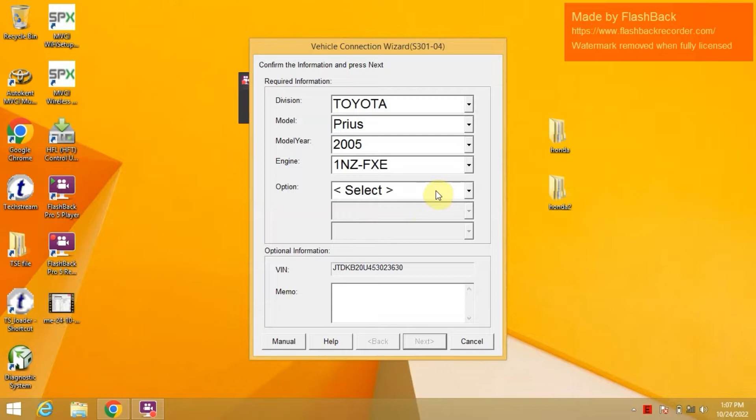Right here it reads the exact type, it auto selects. It knows through the OBD what kind it is, and asks me to select the option with or without smart key. I have no clue, I would say with key. I think I have, I don't know. If it doesn't apply, it probably won't appear. But I always click all the highest options. So here it's communicating with the car.

This usually takes a while. This is not sped up, this is real time, I didn't speed this up. I'll tell you where I sped up and where it's faster.

So on here it will tell you the engine, the ECU, the year, whatever. This is what it looks like: engine and ECU, hybrid control, HV battery, smart key, cruise control. You can always pause any of these to look at exactly what's listed. So this is what it looks like.

Then I'm going to do a health check. The health check basically scans the car, it auto scans the car. Right here it's asking, do you want to scan the car? I always leave it on the default, so it doesn't do too much for me, because all I need to know is just the code.

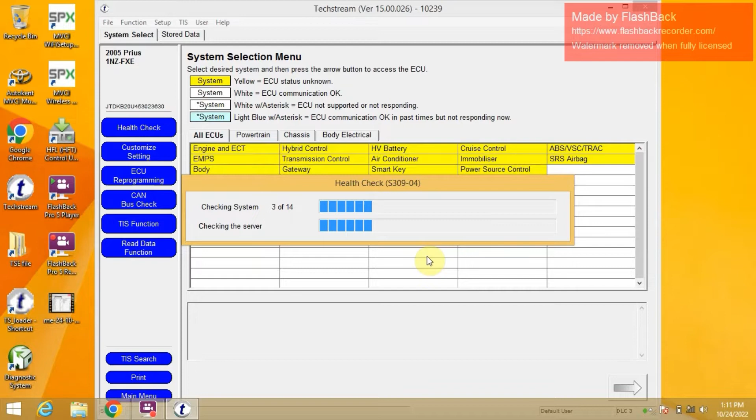So on this part I sped up. This probably takes a while because it's running through like 14 protocols. It might have taken maybe 10 minutes to scan the whole car. It depends on what you're scanning and what your car is. This is three of 14. There's a car I've scanned that had up to 33, which of course takes longer.

Then after it scans, it gives me the result. This is how the result comes out. So the DTCs, these are the codes, the pending codes, or the codes that were erased before.

Right here it says engine and ECT com. So the first one, I click it. Again, you could use a regular OBD too to check the check engine light. But if you have a code on your car, even if you're not sure what these numbers are, you can always Google it. It will tell you the particular code, if it's a P4271 or whatever, you quickly look up the P0 code and it will tell you what it probably is.

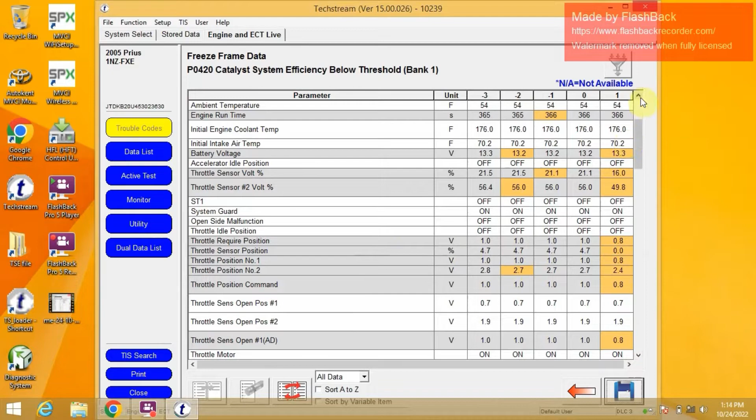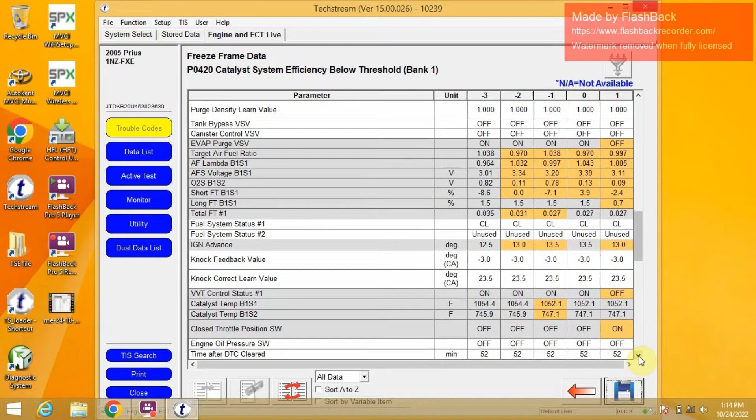So right here, after I clicked on this, it reads up here: P0420, catalyst system efficiency below threshold, bank 1. Now it gives you all the protocols, some of them are yellow. You've got to know how to read this number. I'm not really sure about all these numbers, but you can always have a schematic or something to compare it with, to tell you more what it is or the value it is.

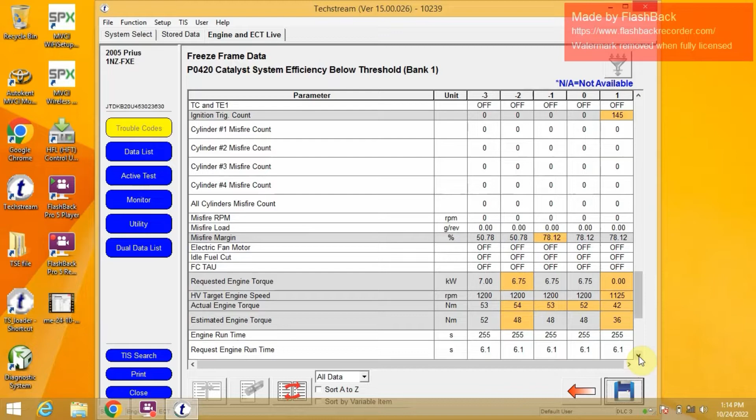But I know why my catalytic converter is leaking — I think about a year ago, I don't remember exactly, somebody came and jacked my catalytic converter and cut it off. So I had to put one of those generic ones on, and they're not really that good. So it still throws a check engine light on the car, but that's just what it is.

So now I'll go back — this is what it looks like. I just want to show what it looks like, but I'll go back. This is again for the hybrid. If there was a check engine light for the hybrid, it would have appeared and told you exactly what it is. But I'm clicking this so you can also see what else it does.

It has an air conditioner option. It says solar sensor circuit or whatever, passenger side.

Not even sure where that is located in the car, but you can always Google it and see where it's located if you really care.

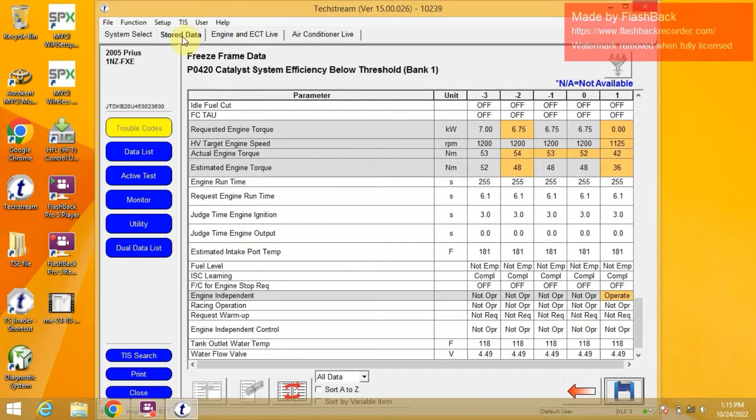This car, I've been driving it for years. It has, I don't even know how many miles, probably almost 300,000 miles. So I don't really care much about it. Anyways.

So now I scan all the codes just to see, going back again. This is what I use. You don't have to, but I'm just showing you the details of what it does, what it could do, and how to use this software. You can always click on any of them and search it. Some might require you to be connected online, but I'm not connected online, or it could have other special features depending on what you have. I'm clicking and you see what parameters I could do or what I could read.

Then right here now I click the hybrid control. Let's see what that's gonna bring us up, because there's more than one way of doing this. Again, if you had a check engine light from the hybrid, you would have seen it before. So now, for the main purpose of this, I'm gonna go look for the hybrid so we could read the values, see the volts or maybe amps, whatever it is.

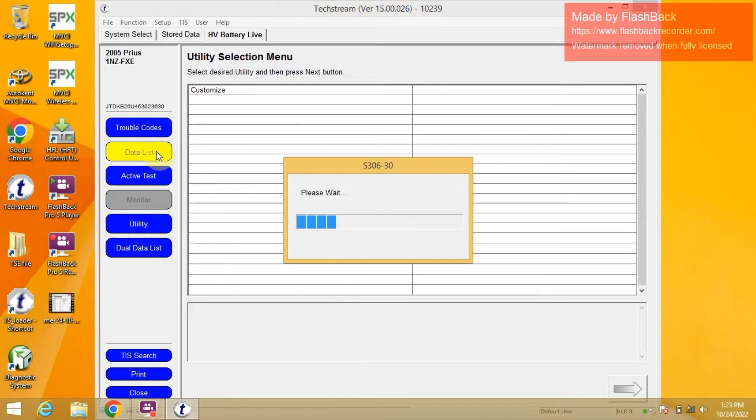I'm not sure what we'll find, but these things, I use it and go through it to see. Like I mentioned before, there's other apps from the phone you could use to read this, like I think Dr. Prius and Torque. One of them does the Prius. They help, there's a way to manipulate it. I think Torque has a pro version and another version, maybe $5-10, I don't remember exactly how much. But considering you're saving significant money if you're able to do this battery yourself or for a customer, $20-30 isn't a killer. This techstream, I forgot how much I paid for it.

So now I got to this parameter. Like I said, you see the battery, the volts, the blocks, that's where it's reading right there. The car is currently on, so if you watch, it's blinking, it's changing. Right there it's reading 16.03, 16.02, it changes. Usually the block that is not good will be off, that's where they call it balancing. It might be like 17, or it would be like 14 when it's not balanced. Right here it's showing from 1 to 14.

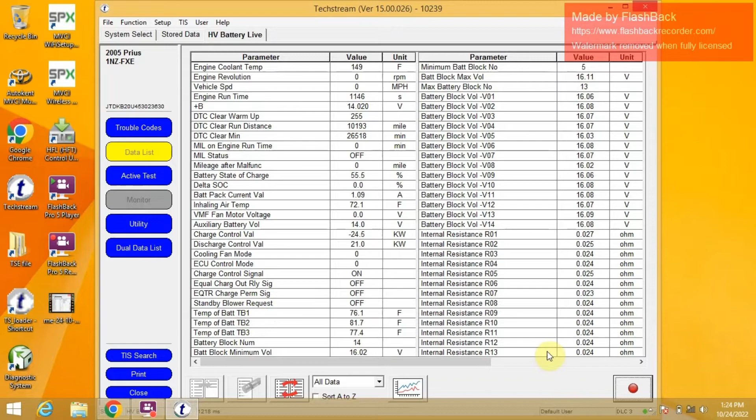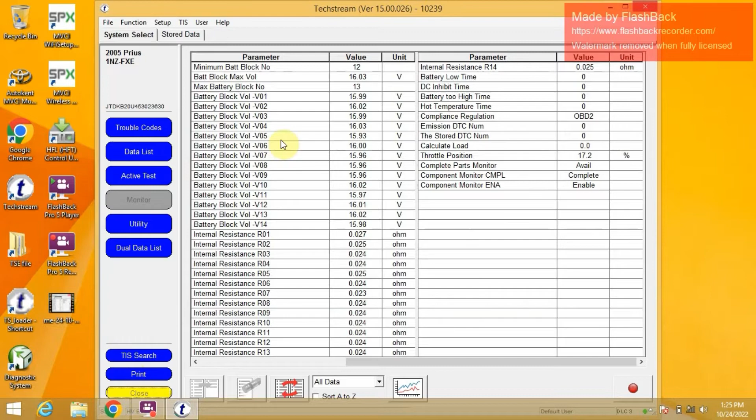So that tells you which one. Whichever one it tells you, if it says 11, that means 11 is bad. Then you go look at it or check it. But this is how it works. So I could go through, check the ohms, check the resistance, it reads it real time. You can also apply a load on these, or maybe there's a way to do a test. I think there's an app, Torque does it, I'm not sure, but it'll tell you to put it on a drive, turn on your AC, turn on your heat. It will give you specification on how to do all that.

So this showed you everything that is needed. Then I'm gonna go and check right here. Let's see what pops up on this side. Let's see.

Okay, so the car is not able to communicate with this side. I'm not sure why it was. Maybe sometimes once in a while it does, it wants me to

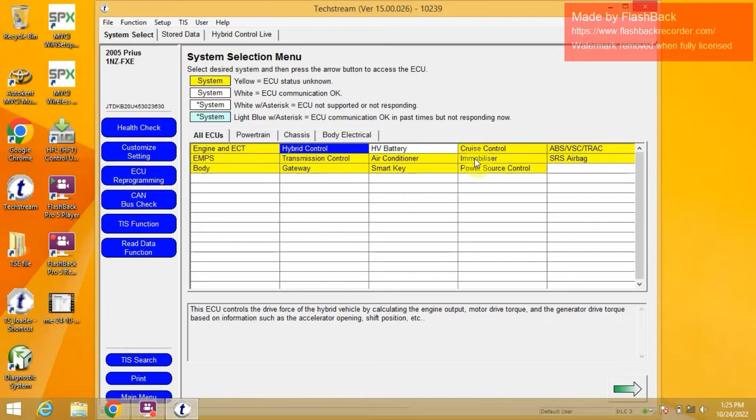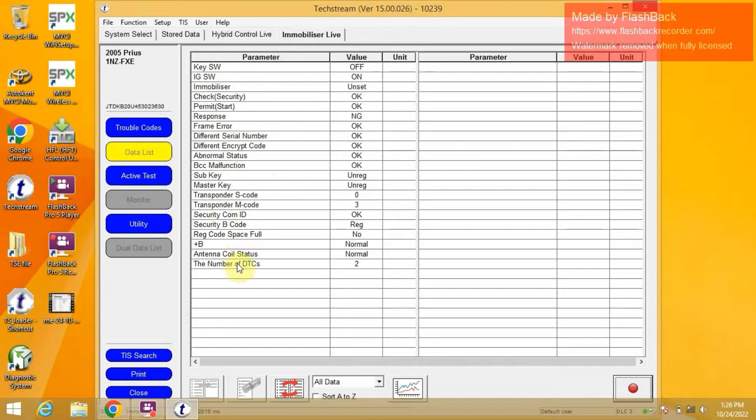rescan again. So I'm gonna go to immobilizer and smart key. Don't even ask me the difference, but the immobilizer here is giving me two communications, but because I did program one key that is like half done or whatever, I think, I'm not sure that's what this is showing. Down this part it tells me keys, smart key, transponder M-code. I'm not really sure. Number of DTC says there's 2 codes in there.

I'm not really sure, but I will go back to another feature that this has, which is the smart key, which mostly helps you program a key to the car, but you gotta have the original or a working key. So right here it tells you how many keys there are already, and right here it could tell you lock, door.

I don't know if this could be reset. It's probably could be set, but maybe it tells you how long, like when you press it, the time, the delay, what each button could do. Could we program a button to do certain things, trim and other stuff? I don't really know, but I just want to show you.

What the software does, and why I prefer using it over the apps. So right here is just key warning and other stuff, key cancel, switch, unlock. I just clicked one of them to see what's gonna happen. Not really sure what it does.

Again, I just use this for mainly two reasons: the hybrid battery, and once in a while to add a key. These key fobs sometimes go bad. So if I need to reprogram or add a key, I don't do a new key unless you have an existing key. So that's what I do with it. You gotta have an existing key. I cannot start from scratch.

So I clicked one of the lines to see. Let's see what utility goes to. So now smart code, there's a lot of stuff here. Key code, erase, not even sure, I don't touch those.

Let's say key code, if you click on it, it says welcome to smart code. This is where you could add another key. It gives you full instructions. For the smart key, you gotta have the key fob, then click next. It says remaining number of keys that could be registered is 3. Currently there's 2, and I know those 2. I have the 2, so I could add 3 more, so I could have up to 5 keys. Then you click next, it will tell you what to do.

The following has a 30-second timer: press lock on the registered key. Then on the non-registered key, lock and unlock. It tells you, and you click next. It gives you a procedure how to do everything. In 3 seconds, click lock again and all that. Then when you click next, it says unregistered key, press lock within 30 seconds.

Again, I'm not programming keys, but I just want to show you all how the procedure works on this. It gives you 30, 40, 50 seconds for you to do what it tells you, which is like unregistered, press the lock within 30 seconds. Then if I've pressed it, you click next, and it tells me the next one. Again, I'm not doing any of this, so I exit it.

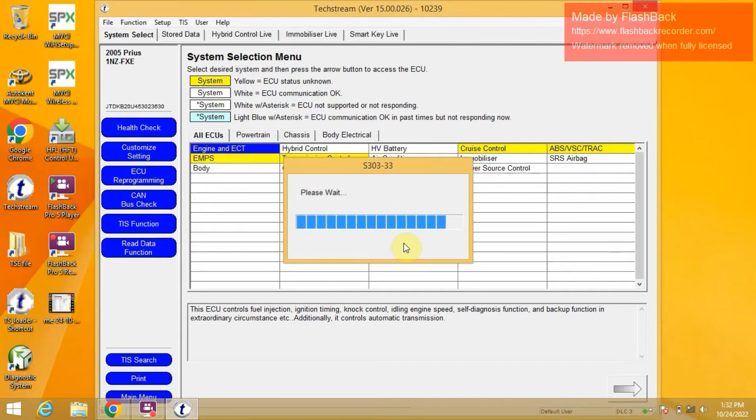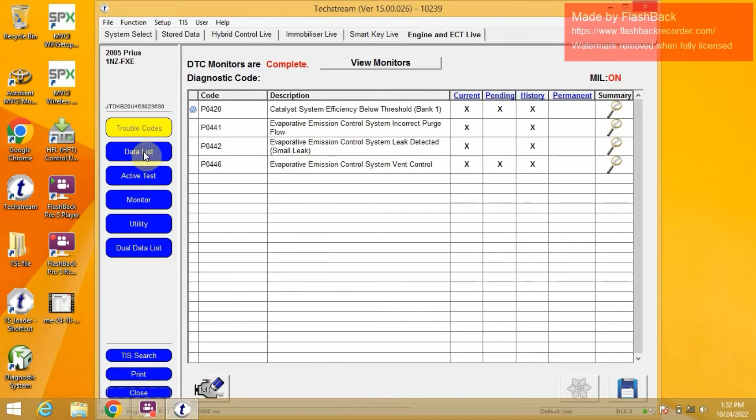Let's see what comes up. So back here again, we're down on this side. Like I said, you come to this screen and it tells you a lot what you could do, you click any of them. The engine part again, I click just to refresh on it.

Waiting for it to read. Maybe I could pull out other information here for you. Let's see this now that has this emission. So there's emission.

So now you can also, these you could print. So now it pulls up this protocol. That way you could, like I said, read a lot of values depending on what you're looking for or what you want to diagnose.

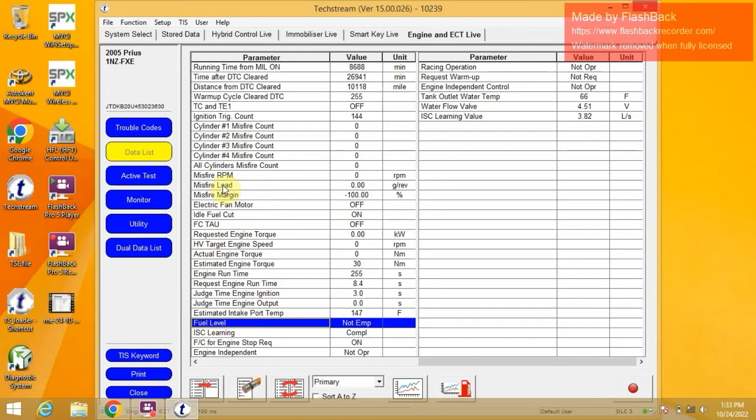It's right there. And again, that's what I use this test for, in case, I mean these are electrical, in case if I need to read a value, or maybe check the transistor, something going wrong that I think might be of value. But again, like I said, all I do is just change the battery, swap the battery, and maybe make new keys once in a while, and that's it.

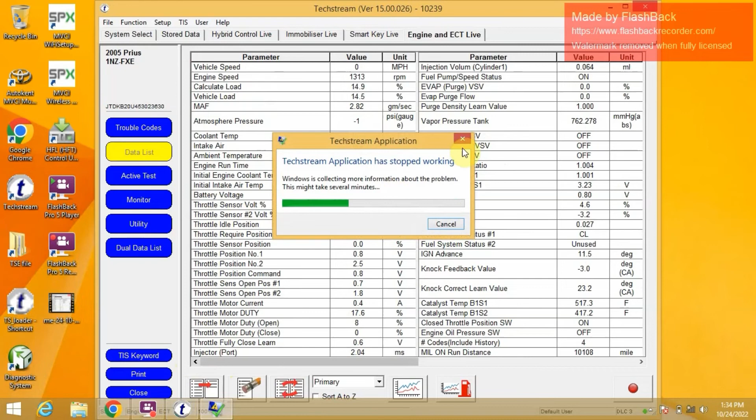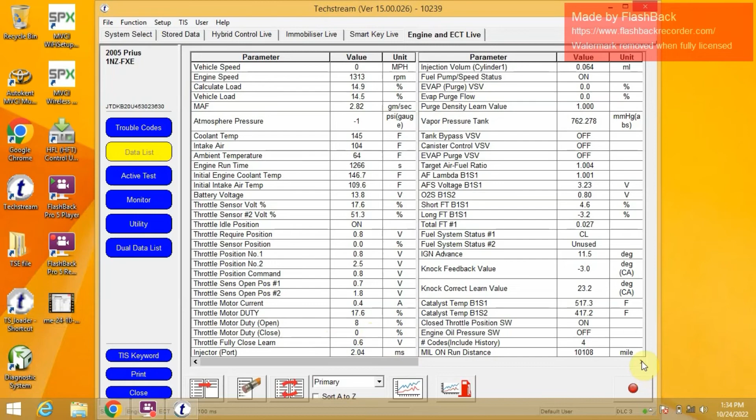So, and that's all about it. I just wanted to give a glance in case anybody's interested in seeing what my screen looks like, and that's what it is. I do have one dedicated laptop that I use to do the Toyota. I do have other stuff that I use for cars here and there, but I just have this dedicated one, so I could save what I need, do any research I need to do, and do this stuff. But that's what the screen looks like.